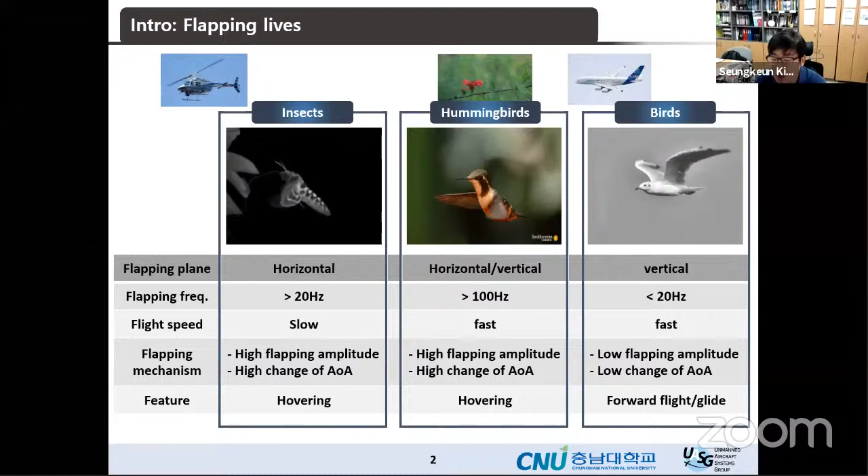But we are very interested in using this kind of bird mimicking flyers for the monitoring of the scene or reconnaissance, because it has benefits for energy saving, and it can easily use the wind. They are repeating flapping and stopping, so they can be very adaptive to the wind. So today I'm going to talk about the bird mimicking flyers in terms of engineering technology.

They are developing small bird mimicking flyers that can fly indoors. The wing shape is very similar to the pigeon, so it can fly successfully indoors. Our group is very motivated by this German company.

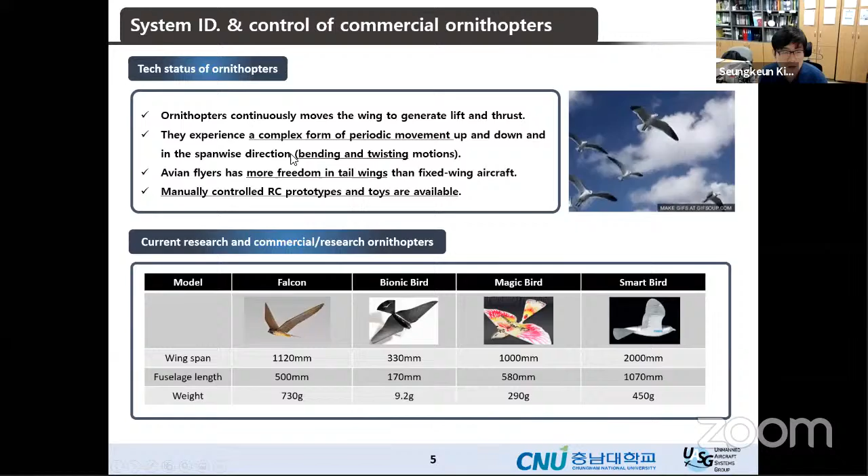Our research goal is platform configuration and modification of the RC aircraft, modeling in terms of a linear system, and controller design and validation. But the important thing is we don't have exact nonlinear modeling. So first, we did flight experiments and gathered flight data, and then in reverse we investigated the A and B matrices from the flight data. This can be viewed as system identification, parameter estimation.

This is the Magic Bird commercial RC aircraft. Endurance is just 10 minutes, and we can control the flapping frequency from 1 to 10 hertz. The elevator and rudder deflections are limited to this band. And then we installed the avionics board here.

You guys know the Pixhawk Mini. This is a very small sized Pixhawk series flight computer, just 15 grams. So we applied this Pixhawk Mini to the bird mimicking an RC aircraft.

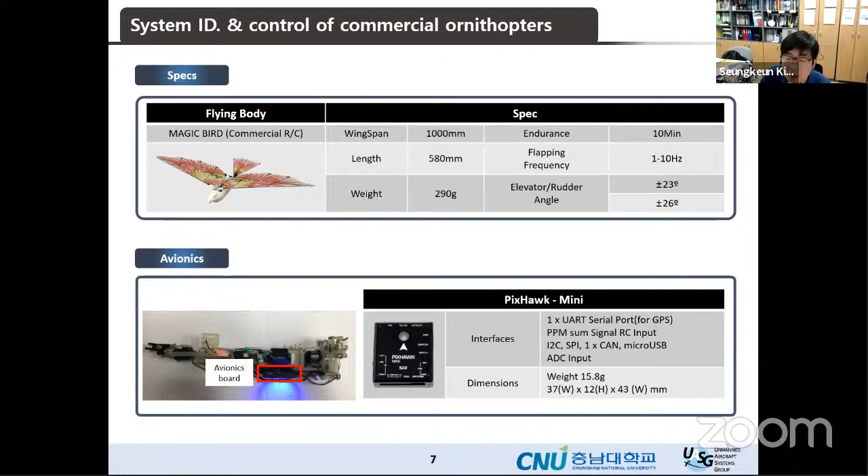And then for system identification, we need input signal design. So we could apply a step or doublet here, and then a 3211 signal for sufficient excitation of the dynamics. So in flight, we have to excite the dynamic response by using the control surface, up and down, so we can excite all ranges of the frequencies.

So we implemented the software in the flight code in the autopilot environment. We modified the PWM signal to additional channels. So we applied 3211: 3 up, 2 down, 1 up, 1 down. That means the time, so 3 seconds up and 2 seconds down, so we can control the elevator for excitation.

So this is the result. Actually we need angle of attack and sideslip angle, that is the relation to the wind. So we need alpha and beta, the angle of attack and sideslip angle for the aircraft. That is difficult to get from the sensors inside the small aircraft. We need angle of attack and beta vanes like this, but it is difficult to get the sensor mounted in the small aircraft.

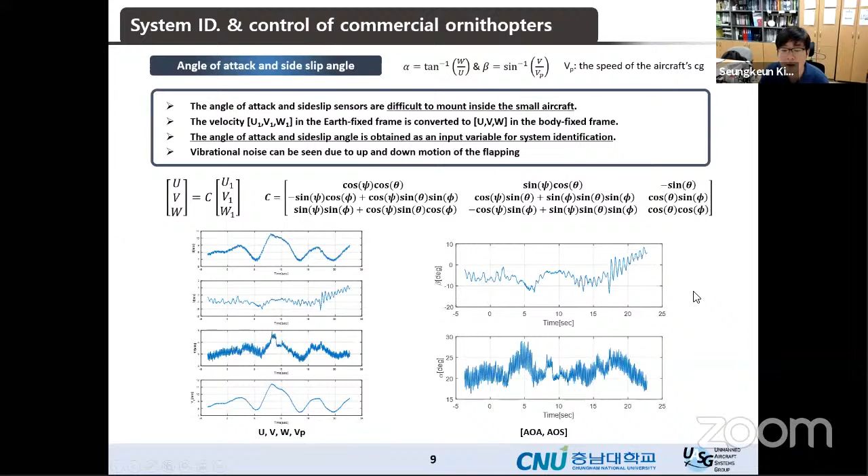So we apply the system identification technique for longitudinal and lateral directional system identification. So we need to estimate the parameters in the linear system here, 1, 2, 3, 4, 5, 6, 7, 8, 9, and then plus 11. So we have 21 unknowns in the linear system here. Not just 21, because we have 3 unknowns here and 3 unknowns there. So 27 unknowns for the A and B matrices.

So we can run an optimization technique using preconditioned conjugate gradient for reversely getting the A and B matrices for the linear system. So here x true is the flight data, and x hat is the integrated computed state response from this parameterized system. So from the flight data, we can get these 27 unknowns.

So here is the result of the system ID. This is the longitudinal and this is the lateral channel. The blue line is the flight data, and the dotted line is the model predicted from the system identification. So as you can see here, most of the unknowns are found from the system identification process. So we can get the longitudinal A and B matrices and lateral A and B matrices.

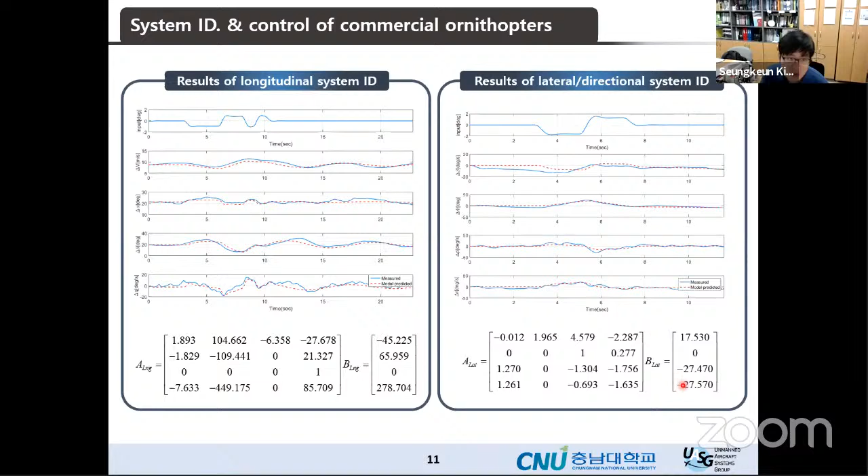And then these are the eigenvalues of each channel. As you can see here, there are two pairs of stable eigenvalues, complex poles. And then in the lateral channel, we have one stable eigenvalue, one stable real eigenvalue, and one unstable eigenvalue. So this is the roll mode. So actually, in the lateral directional channel, we found one unstable pole.

And then before the flight test, we designed the controller using PID and feed-forward terms here. So we decided the gains for the linear system, and this is the actuator model and aircraft dynamics. We applied the system ID result to this controller design and simulation. This is a very simple linear simulation, actually. As you can see here, the theta step response is well tracked, and the up and down motion is also well tracked. This is the theta reference and command.

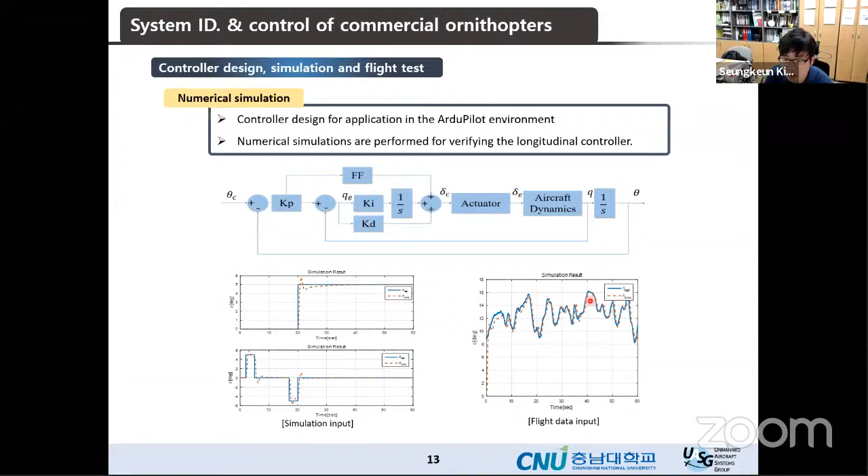And then we check the altitude channel. We apply a 30-meter command to the altitude change here, and the dotted line is the response of the dynamics. As you can see here, the pitch is going up and then goes forward, up to the 30-meter altitude increase.

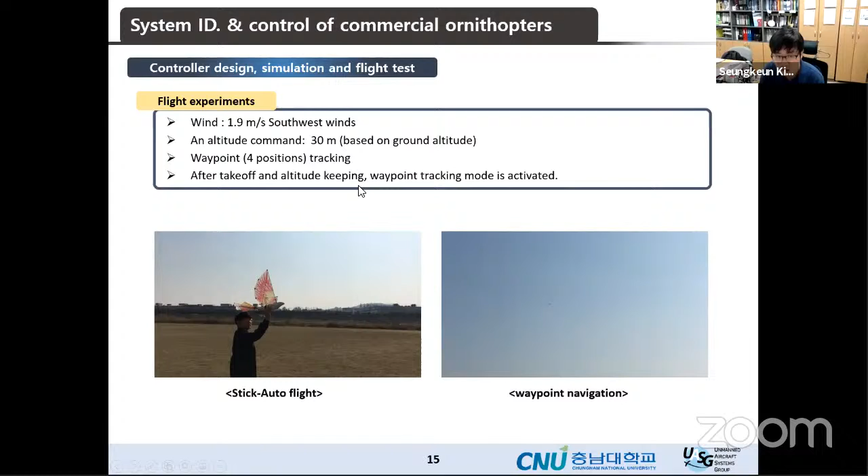Finally we did the flight experiment in this wind condition, and the altitude command is 30 meters above ground altitude, and then we designated 4 waypoints. After takeoff and altitude keeping, we activated waypoint tracking mode. This is stick auto fly.

So actually the commercial RC flapper is very stable. So we check the attitude control mode by using the stick command. So the pitch command and roll command is generated from the stick, from the RC controller, but the inner loop, the automatic control, is working.

And then after that, we activated waypoint tracking. This is automatic mode. Actually, one of our students lost the focus, so you cannot see properly. So this is the data. So this is the pitch angle, and this is roll angle.

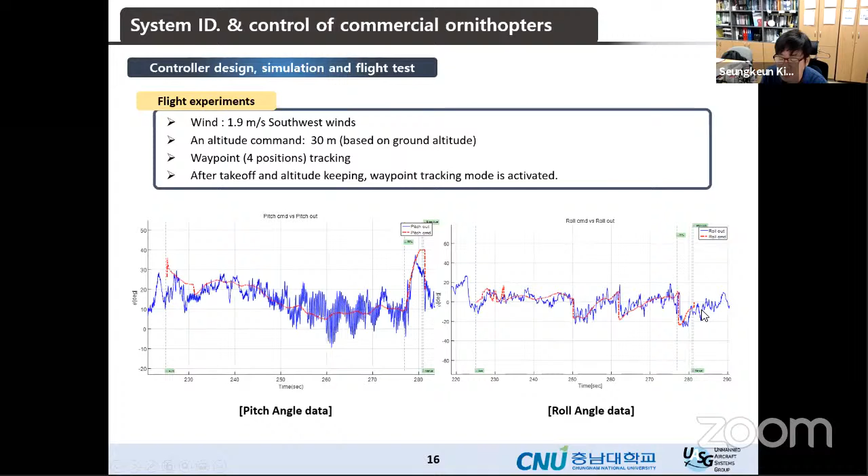So the waypoint tracking is successfully done by using the flapping wing, the bird mimicking flyer. So we can realize this kind of aircraft can be used for waypoint tracking, and then the reconnaissance mission, and then it can fly with small energy.

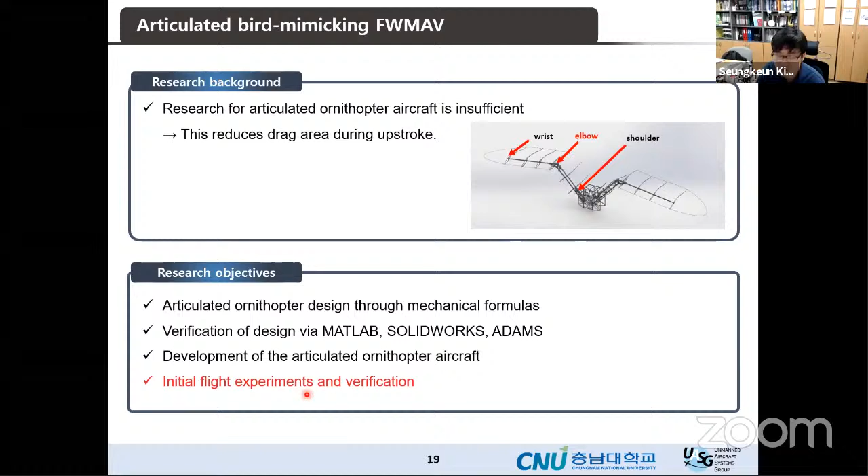So our research objective is articulated wing design through mechanical formulas and verification of design with MATLAB, SolidWorks, and ADAMS tools. And then we developed the articulated aircraft, and then we performed initial flight experiment and verification. We are much motivated by the fact this size is 1 meter and wingspan is 2 meters. So this is very big. Ours is smaller than this guy.

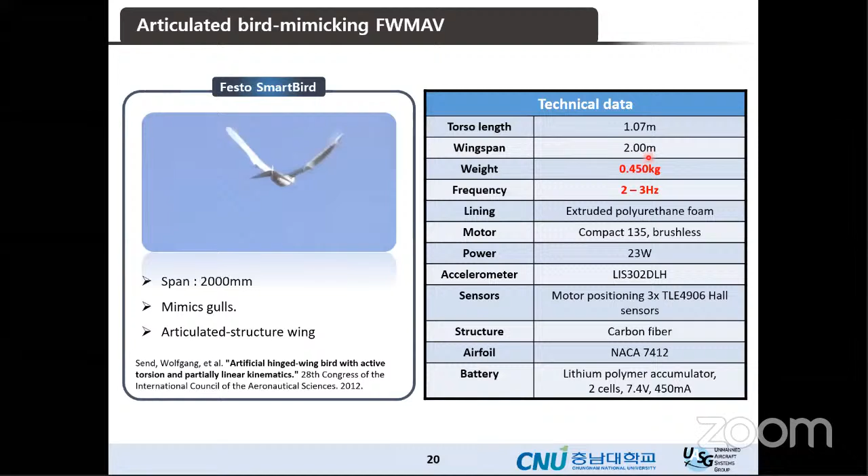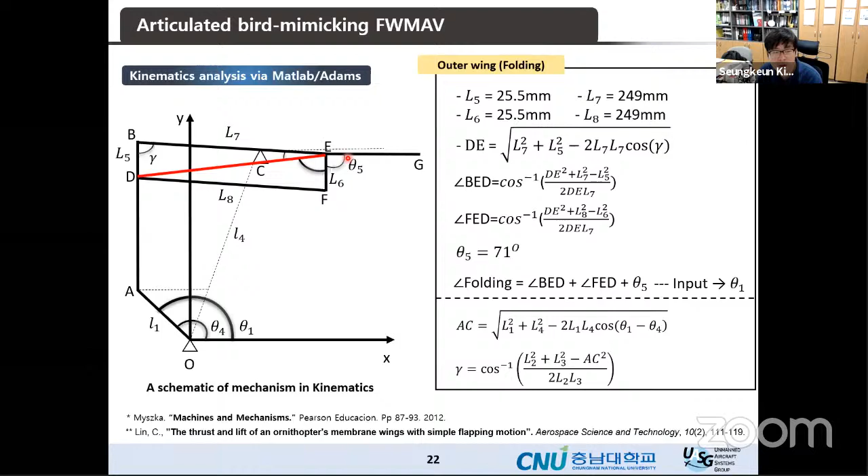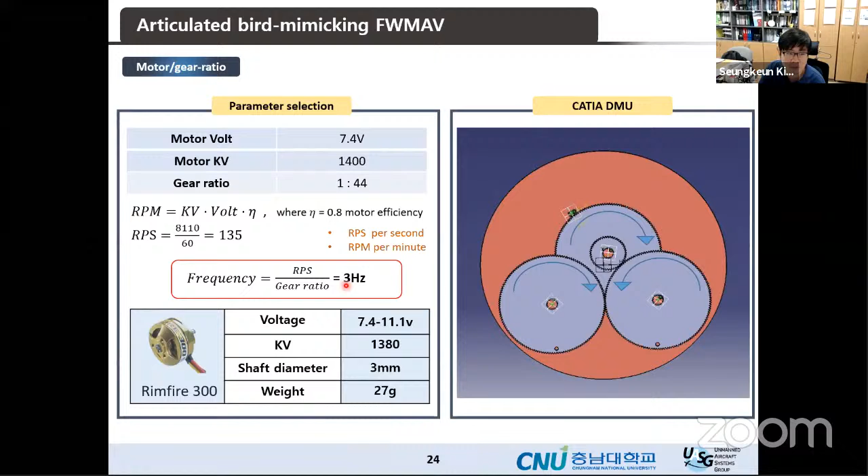And then this is the actuator for flapping here, and there is one motor. As you can see here, the tail degree of freedom is more than the fixed wings. And then we use the bearings here and there to make the intentional torsional motion on the wing. And then we use the commercial RC parts and receivers.

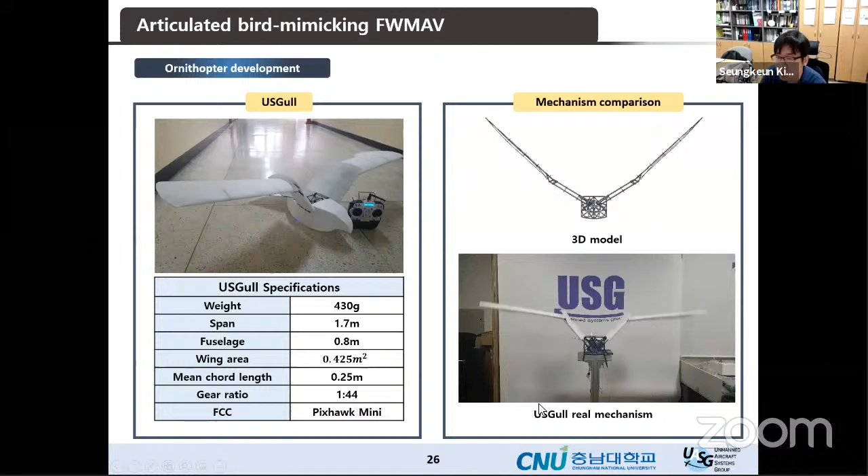Yeah, this is finally developed, this unmanned system. This is the board name. So weight is 430 grams and span is 1.7 meter. So this is our design. So the real mechanism is very similar to the 3D model, which verified our design.

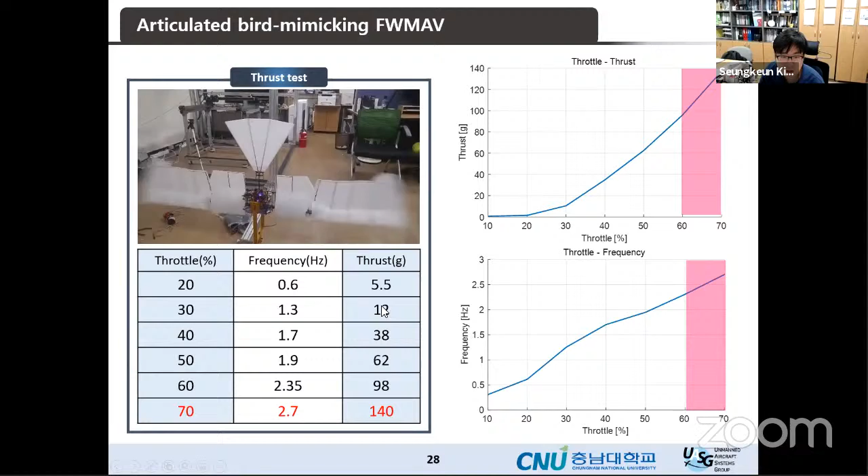And then this is the thrust. So by using some force sensor here, we want to measure thrust generated from the flapping motion. So depending on the frequency, with 70% throttle, we could get thrust of 140 grams. So this red area is our normal operation range.

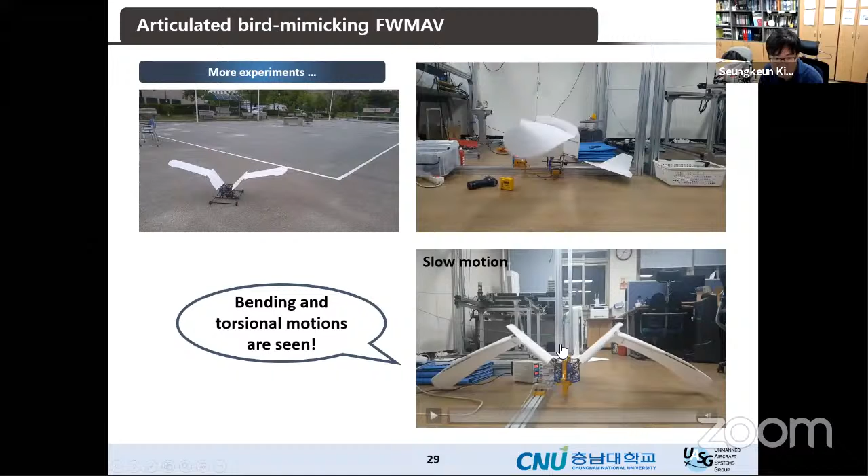Yeah, this is the test for forward flight. So we are measuring the thrust and the motion of the main wing. I will show you the bending and torsional motion using slow motion. Can you see some bending and torsion? So the outer wing will experience more torsional motion, just like a bird. And then we could minimize the drag during the upstroke.

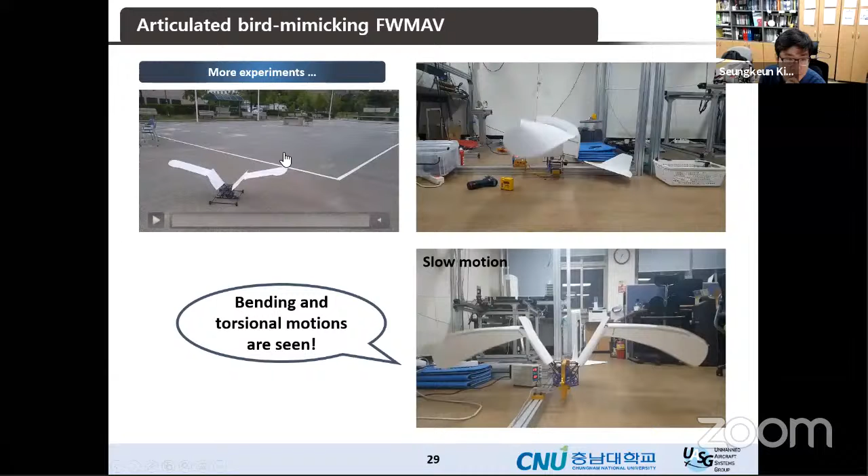And then one of our students did an interesting experiment in the basketball playground. I will show you. Yeah, this is the world first flapping car. So we verified it has the forward force, the thrust in the forward direction on the ground. And then finally, at last, we did the initial flight in Cheongju near Daejeon.

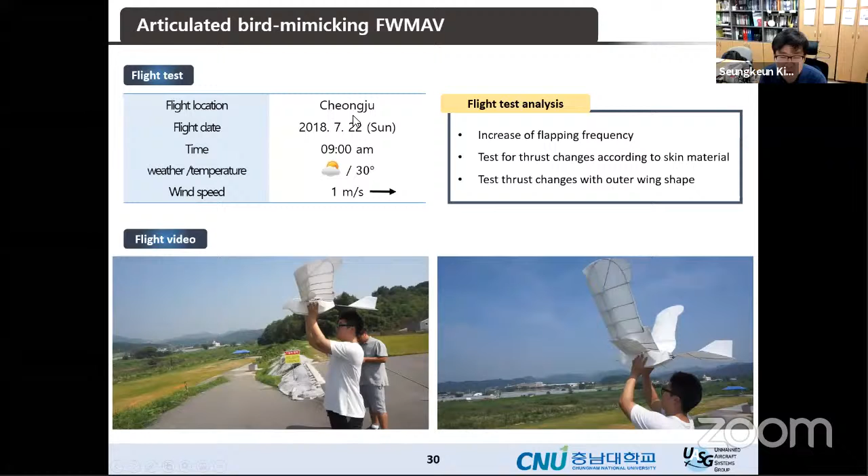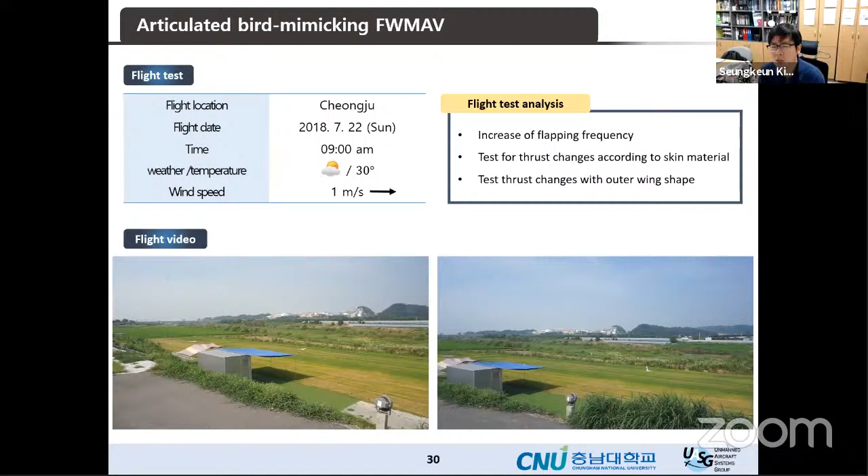Yeah, this is under our expectation. And then, yes, we failed in the initial phase because it had insufficient thrust and weight. So we changed the throttle mechanism, and then we realized some center of gravity problem. I will show you. This is the flight experiment in our university. Yeah.

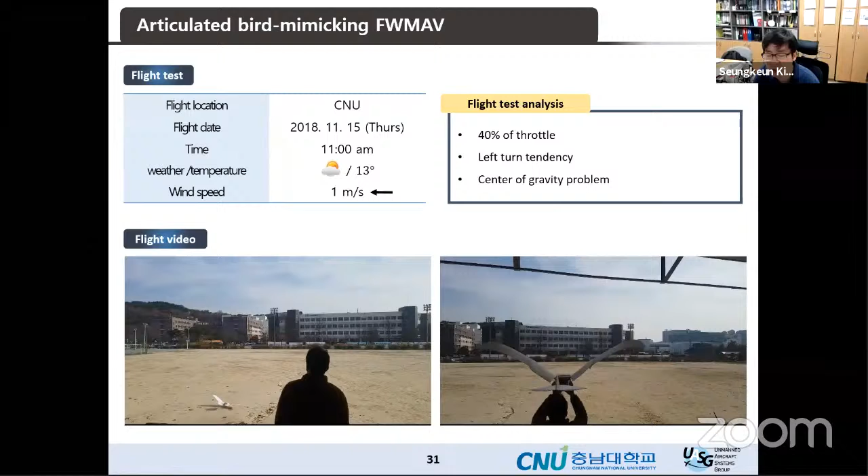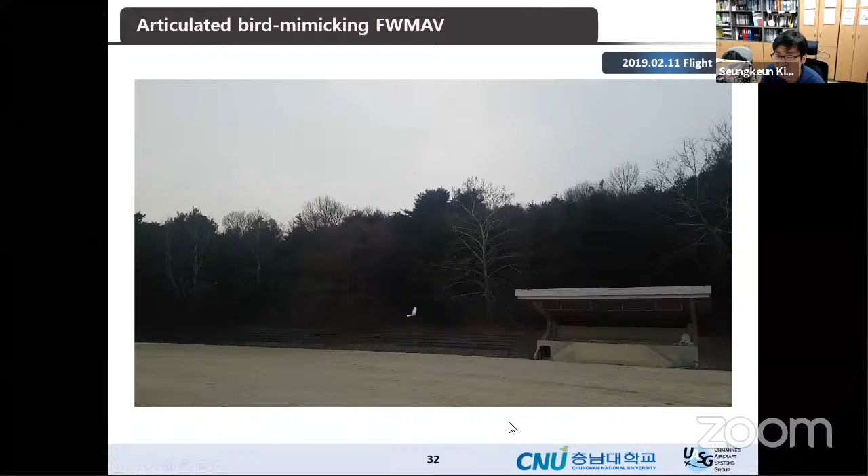So we struggled with the flight testing, many fails and many failures. So our research team was very disappointed in this kind of flight experiment failure. So this is last year's flight in our... Yeah, finally our ornithopter is in the air.

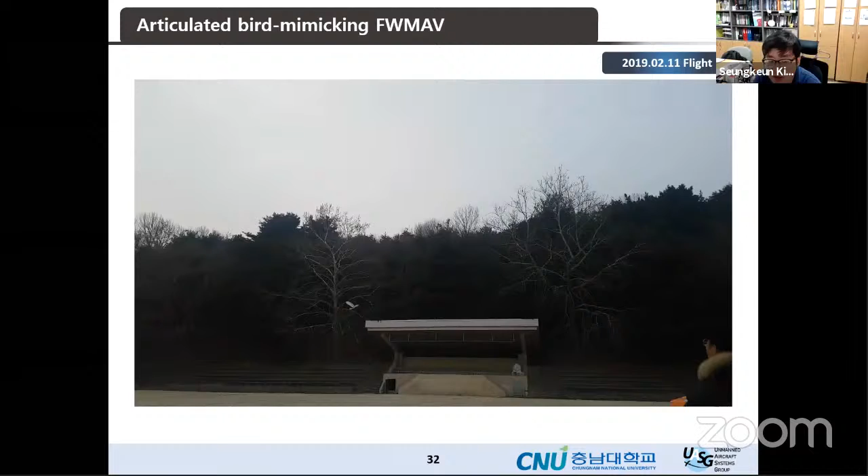So we modified the flapping mechanism and the wing shape and then the position of the center of gravity. So we successfully made this fly in the air last year. So we are modifying the mechanism, and this is ongoing work. So our students are laughing.

So actually this kind of bird-mimicking flyer, if they are going up, we cannot discriminate it from the bird. So actually it has some camouflage effect. And the speed of them is very similar to the bird, and the flapping motion makes the enemy confused on their radar system.

Okay, now I will finalize my presentation with discussions and Q&A. So we did system identification and controller design and simulations of RC ornithopters. System ID was done successfully with a modified open source autopilot environment, specifically ArduPilot. I've not used the PX4, so we applied the ArduPilot. And then altitude hold, and waypoint navigation were successfully performed.

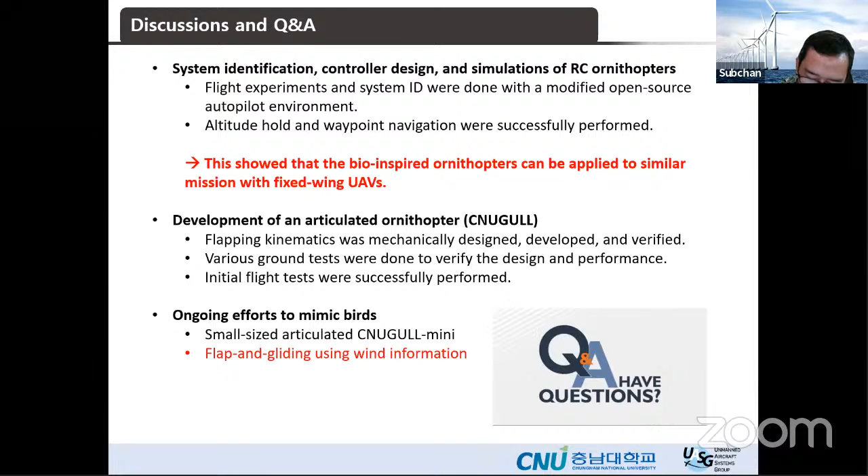So, Dr. Okay. Subchan, yeah. Thank you very much, Prof. Kim. Very, very interesting, Prof. Kim. I think Mr. Hendro will make a competition using bird mimicking soon, maybe, because in Germany, Festo has very, very good bird mimicking. Yeah, it's very, very interesting. Anyway, we will have questions and answers at the end.

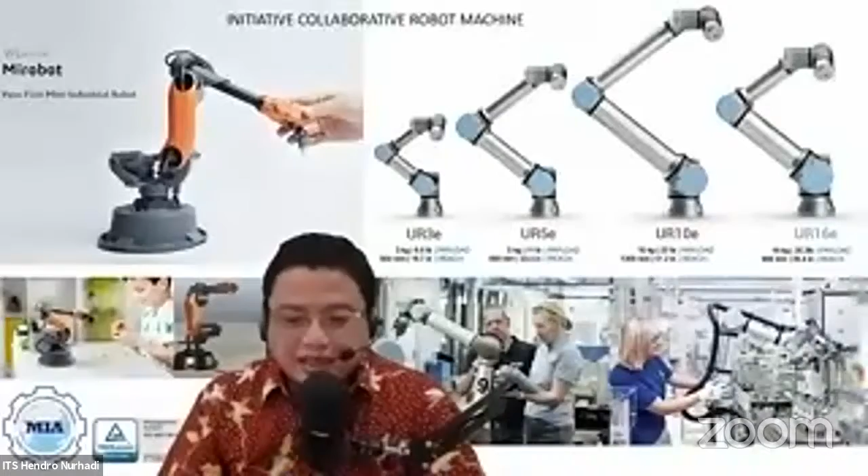Excellent presentation from Professor Kim. Good morning, everybody. Different from Professor Kim's presentation, this time we would like to emphasize how to initiate. So let us introduce the initiation: designing and developing a collaborative robot machine instead of differentiation of industrial robotics. So I will try to put the presentation on the share screen.

Okay, this one. Oh, which one is this? Oh, this one. Sorry. Okay. Is my PPT already available on the screen? Yes, very clear. Thank you.

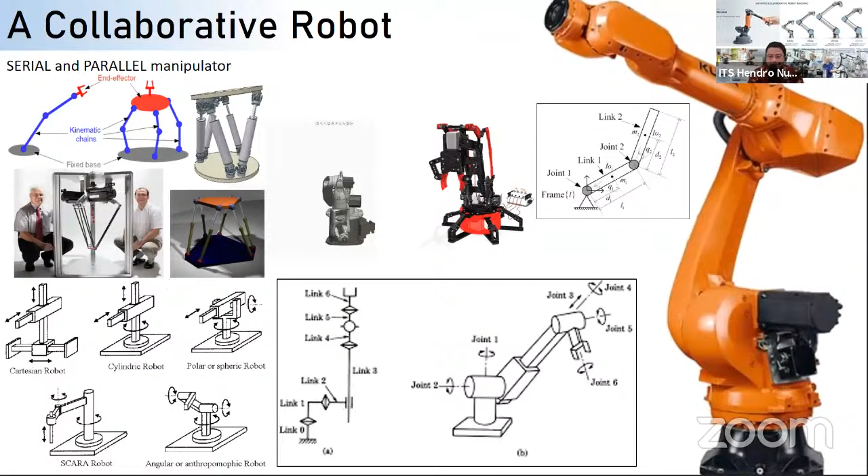Okay, in the definition of robots, we know that a robot is a tool. A robot is a helping medium for human beings to perform jobs in the daily activity of a human being. What is interesting is that recently, since the 2000s, so-called collaborative robots have been developed. What is a collaborative robot?

In 2005, Universal Robots was established and developed the first generation of collaborative robots. Omron, one of the biggest companies that intensively develops mechanical and electrical applications together, mechatronics applications, defines cobots as collaborative robots that can be used to build an innovative and intelligent manufacturing environment where humans and machines work in harmony. That is the key point actually. Humans and machines work in harmony.

In other words, in Wikipedia, we found that cobots or collaborative robots are robots intended for direct human-robot interaction within a shared space or where humans and robots are in close proximity, as cobots are intended to work alongside humans.

So what is different between classical robots in industrial applications and collaborative robots, which are actually also part of industrial robots? If we talk about collaborative robots, we have to pay attention to the safety and the comfort of a human being in performing their activity or daily jobs. That's why collaborative robots are regulated by several standards of safety and security and also environmentally friendly regulation.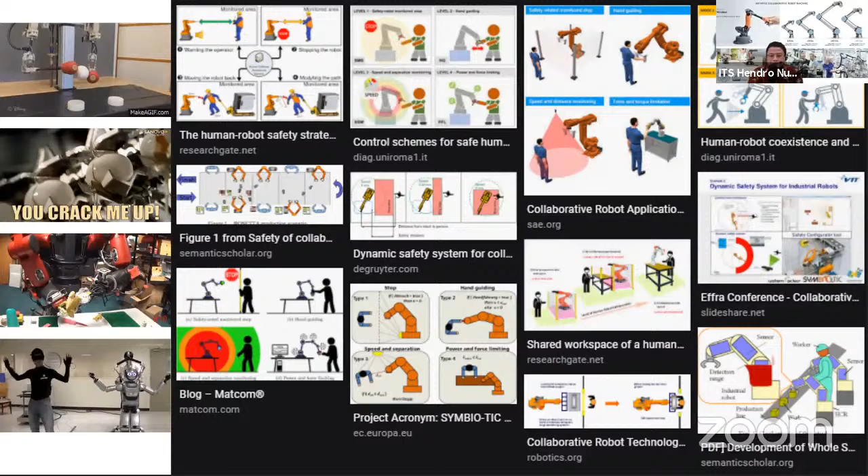So in this phase, in our center, we are now starting to design and develop collaborative robots. In the design phase, we try to get references from Universal Robots collaborative robots and also other references such as Omron and different types of collaborative robots from different companies. But the key point of the design here is that we refer to several commercialized products.

The key point that we want to get from the designing phase by observing the commercial products is to get the design criteria. Since several robots are already developed, they are designed with several conditions, with several payloads, with force in the range of 3 kilograms, 5 kilograms, 10 kilograms, 16 kilograms, compared to industrial robots that usually may accommodate a payload of 1 ton or several tons.

That is the biggest difference between the classical industrial robots, without sensing of human interventions, and collaborative robots that are intentionally designed and dedicated to collaborate with human beings. So we are currently just starting to design the design criteria, focusedly in our center. And the developing phase runs in parallel with several students from the mechanical and industrial engineering departments, and also the physics and mathematics departments, mostly current interns in our center from the mathematics department.

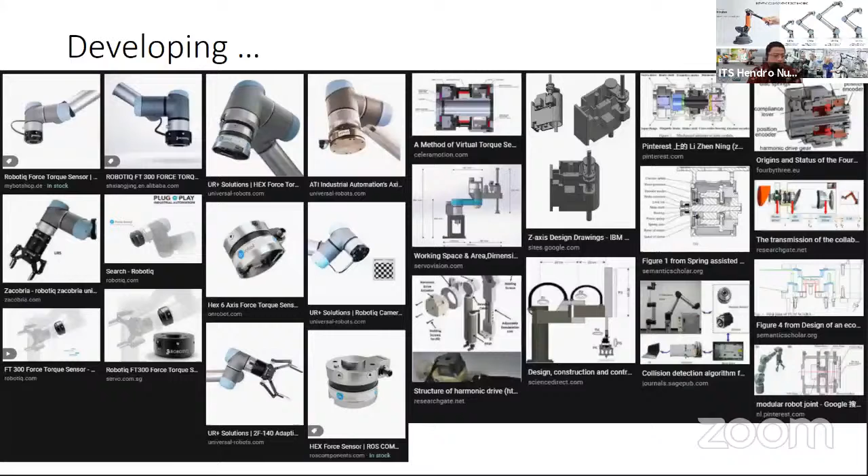We refer to three kinds of commercial or ready-developed robots. The first is collaborative robots by Universal Robots. Nowadays in our laboratory there is one collaborative robot provided by our industry partner, PT Handal Yasindo Sejahtera. They support us by supplying one collaborative robot of type UR5, but without the E specification. E means that the collaborative robot by UR is already completed with sensing devices, so we may collect and identify information such as force, torque, and velocity simultaneously. But the robot in the previous CB version doesn't have this kind of specification yet.

And also Omron. So we can see that although they are different companies developing collaborative robots, the outlook and the designs all look similar. Collaborative robots developed by several industries have identical geometrical shapes and configurations. The cobot configuration consists of 6 degrees of freedom, and normally consists of 3 main components. The first component is the robot itself. The second is the control panel. And the third is the programming pendant or remote control, wireless or wired.

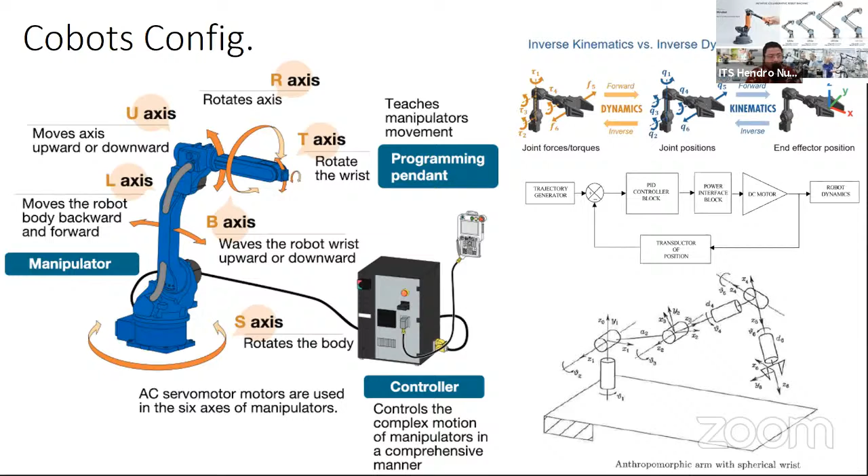Okay, so what actually is maths in cobots? We also have one speaker here, Dr. Latifah. She is my colleague in the mechanical engineering department, and she is also an expert in robotics mechanisms. And this formula looks very close to Bu Latifah.

So math in cobots is relatively close to rotational matrices and transformation matrices. There are some illustrations in our presentation of how we design the performance criteria of our robots using rotational matrices and transformation matrices, by homogeneous matrices or non-holonomic robot performance matrices for different types of robots. And in robotics, the Jacobian matrix is one of the tools that helps us know the relation between joint velocities and end-effector velocities of the robot.

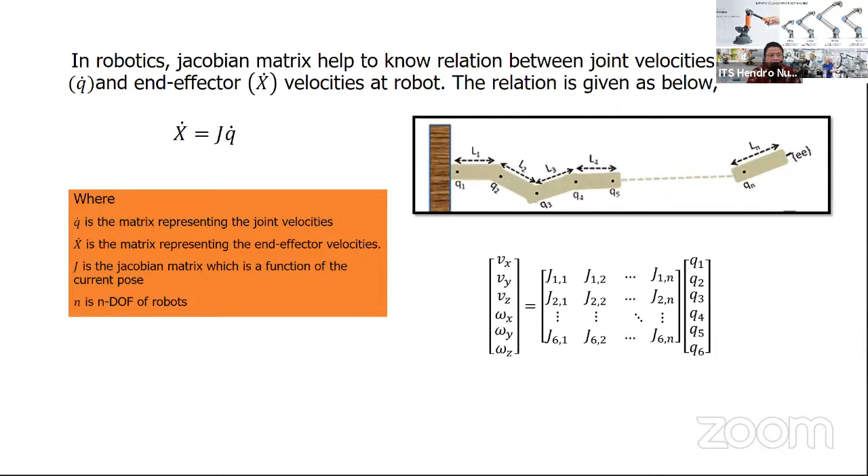There are many maths tools we may apply to identify and design the performance criteria of how to move our robots. There is one example, a simulation in MATLAB, of how to calculate the rotational transformation matrix using a Jacobian matrix. As we see here, we may design the forward motion and identify the inverse information of our robot performance, and vice versa. We may put in the inverse kinematics information, and we will get the coordinate information.

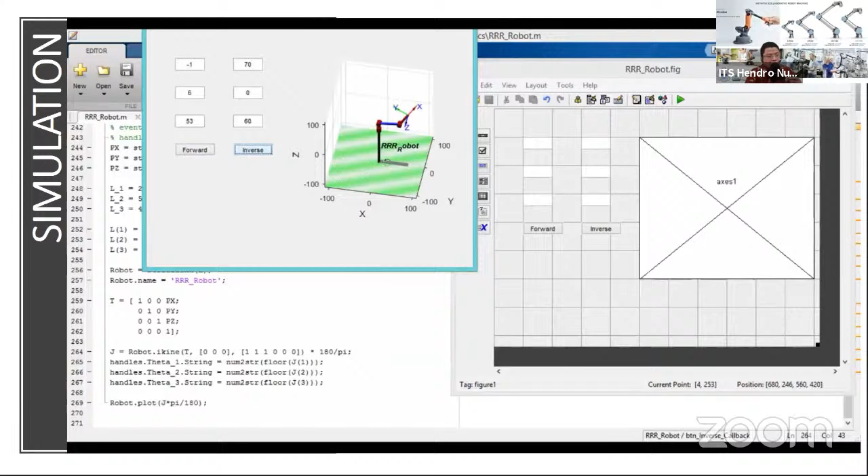Okay. And now we are collaborating with PT Handal Yasindo Sejahtera at the Robotics Center. As you can see, we are first collaborating among ourselves. It is time for us now to go outside, to ask everybody to join us in doing reverse engineering, starting from the end and finishing at the beginning. That is the philosophy of reverse engineering, and we will focus on high-level control design in developing a collaborative robot, since many industries have already developed this kind of collaborative robot, starting our own high-level control of collaborative robots. And stay happy, since happiness may increase our immunity.

And as I mentioned at the beginning of the presentation, Pak Subhan, I would like to ask your permission to access our laboratory to show you the live demonstration performed by our students, who have already prepared. So please.

What is his name, Mr. Hendro? Slati, actually. The Zoom account is a Slati account. Just a second. Wait. Slati? Just a second. I have to make them a co-host first. ITS. Okay.

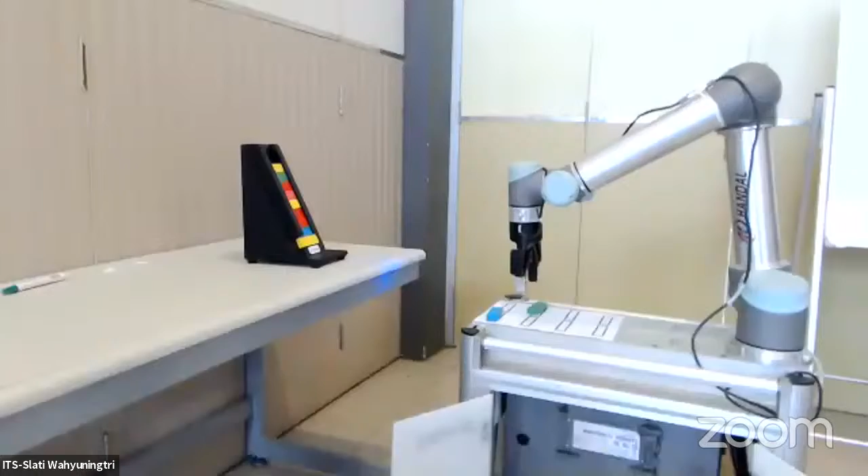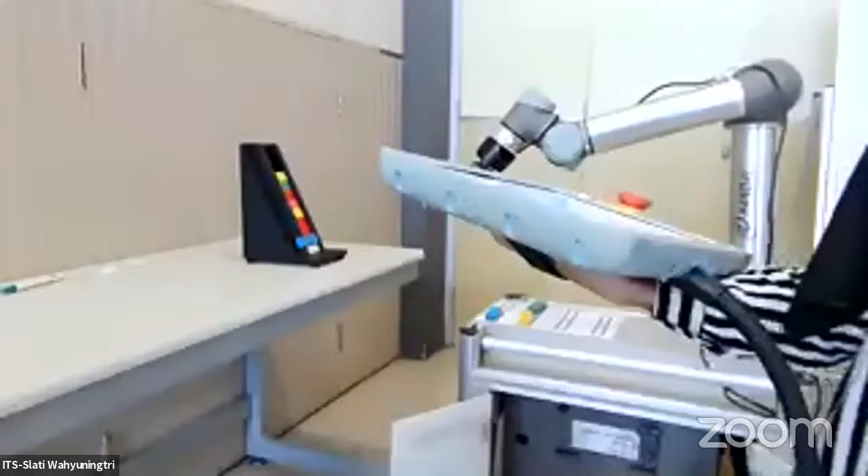Yes, this is a robot from PT Handal, and we can control the robot from the teach pendant. Okay, can you show your teach pendant also? Yes. One of you who holds the pendant, show all the audience, all the viewers, that you operate the robots. Okay, this is the teach pendant of the robot. We can operate the robot manually or automatically. So who is this? Sulastri or Slati or Salma or Mega? Here. So we can

It seems that, sorry, Pak. Oh, Cory. Okay, Cory is a master's student from mathematics also. Mr. Hendro is hijacking my student actually. Thank you for supplying the students to our center, Pak Subhan. Yeah, it's okay, quite good collaboration. Yes. So Prof Kim, in Indonesia it is interdepartment. We have interdepartment collaboration, especially with the Center of Mechatronics and Automation.

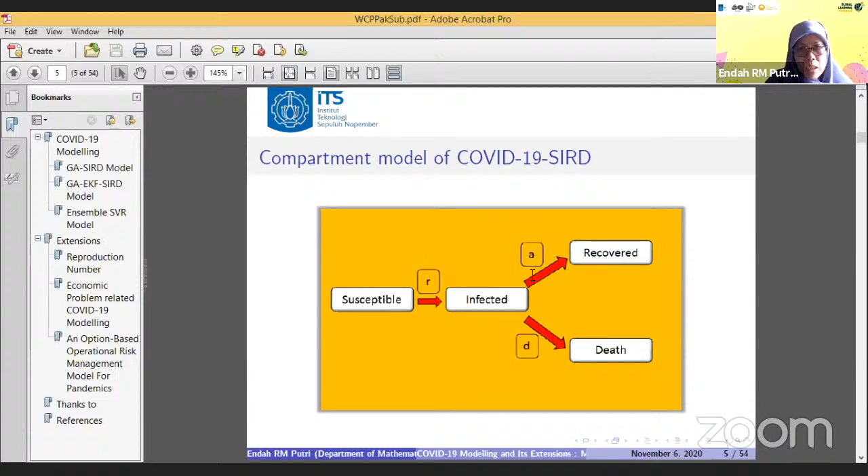Here, the first hybrid model that we use is a genetic algorithm SIRD model. In this method, we estimate the parameters and also the initial values of COVID-19 spread by using a genetic algorithm. A genetic algorithm is an algorithm that mimics a natural evolutionary model by using genetic inheritance. It uses crossover and mutation operators to process the chromosomes in the population until we get the best result of prediction. This is the genetic algorithm workflow.

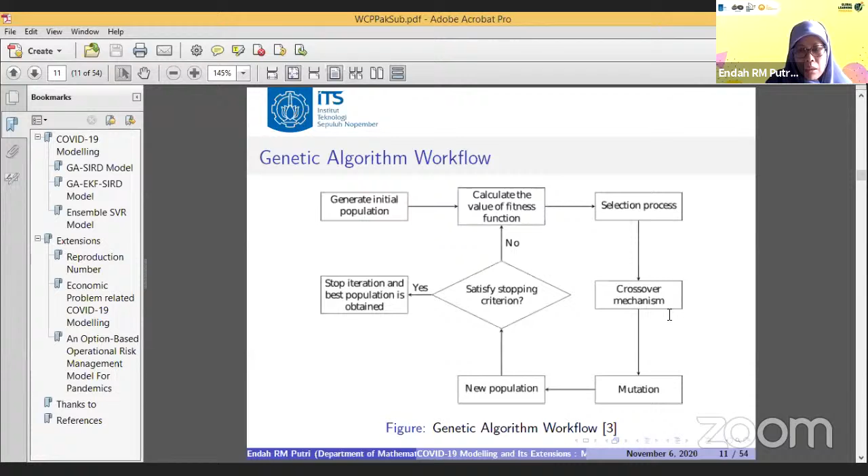Starting from generating the initial population, then we calculate the value of the fitness function, and then we select the best fitted fitness function, and it is like a closed loop that will stop after satisfying the stopping criterion. The stopping criterion is related to the best prediction or the smallest percentage of error. And here is the detailed stage of the genetic algorithm.

Here we have the daily data of infected, recovered, and also death. We apply it to Indonesian data, obtained from the official website of the government, so we assume that the data represents the condition of the COVID-19 spread. There are 5 stages, and the basic point of these stages is to have the best chromosome. In this step, we can guarantee that the new chromosome is definitely better than or the same as the previous chromosome. So that is the basic algorithm.

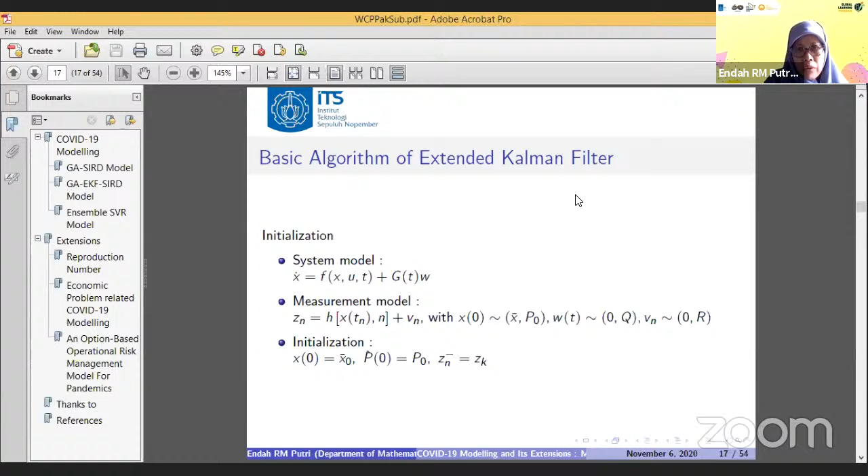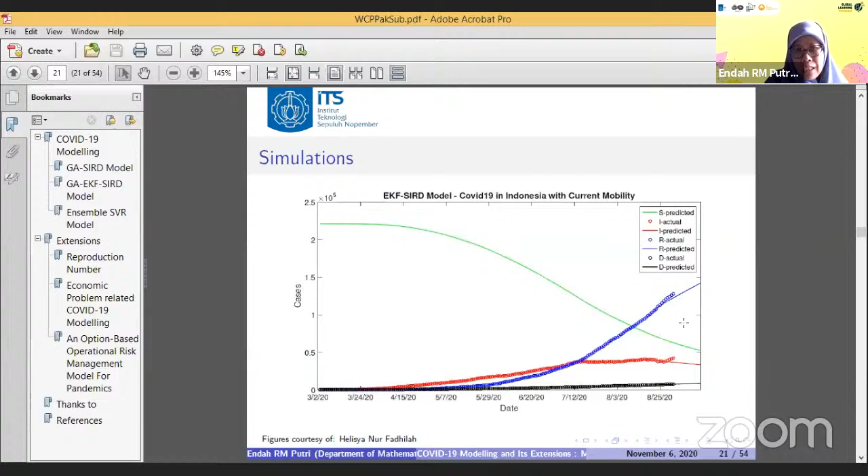So in the extended Kalman filter, we can update the prediction based on the incoming actual data. In that process, the result will be better because one step ahead, the prediction will be improved by the incoming actual data. So this is the result of the simulation, and we can see that the prediction result can follow the actual data better than the GA-SIRD model. So here we can consider that EKF can improve the GA-SIRD model.

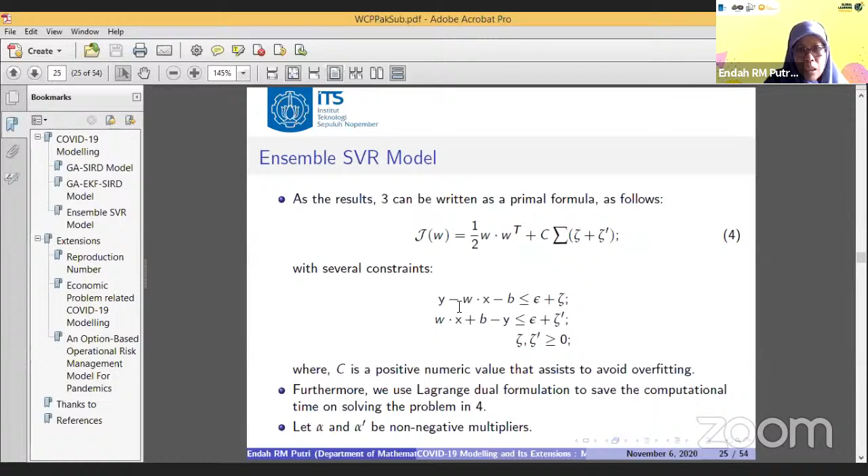And now the third model is different from the first two hybrid models. Here the model is purely a machine learning method, called the ensemble support vector regression model. And this is the basic algorithm of the method. I'll go through it just at a glance. And this is the last formula using the method to be solved. And based on equations 5 and 6, we can provide the simulation result like this.

And basically, the first step in the ensemble SVR model is about ensembling or generating sample data, and it will ensemble the actual data from other countries' data. So the idea here is that we will find the most suitable or the most fitted distribution of other countries' data to Indonesian data. So here we use China, South Korea, and Malaysia to be our ensemble sample data.

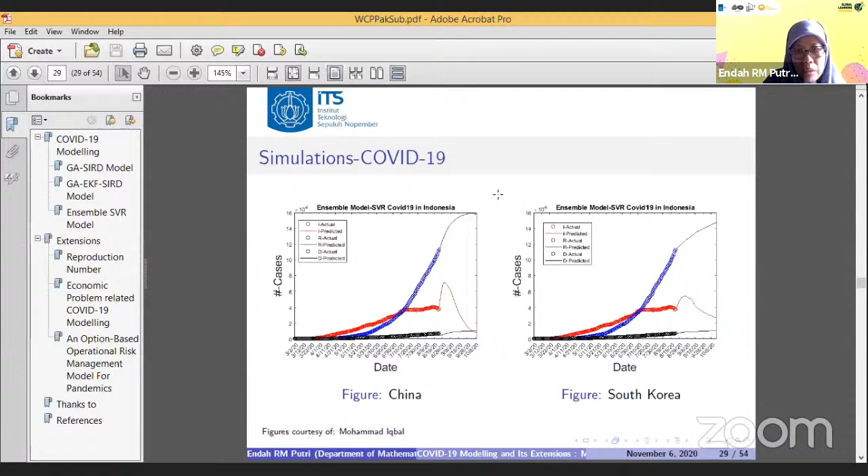As an extension, we can use the prediction of the spread of COVID-19 to determine other subjects or other fields. The first is about reproduction number. We can use the reproduction number to measure the severity of COVID-19 spread. So by having the reproduction number, we can measure whether the spread is weaker or still very strong in our surroundings. So in modeling disease transmission, it can help us to inform and evaluate control policies.

We sometimes hear from the government about the reproduction number and how it can be used to decide whether the partial lockdown, like in Jakarta, will be continued or stopped based on the current calculation of the reproduction number. And this is the paper by the SimcovID team, where we are joining their research.

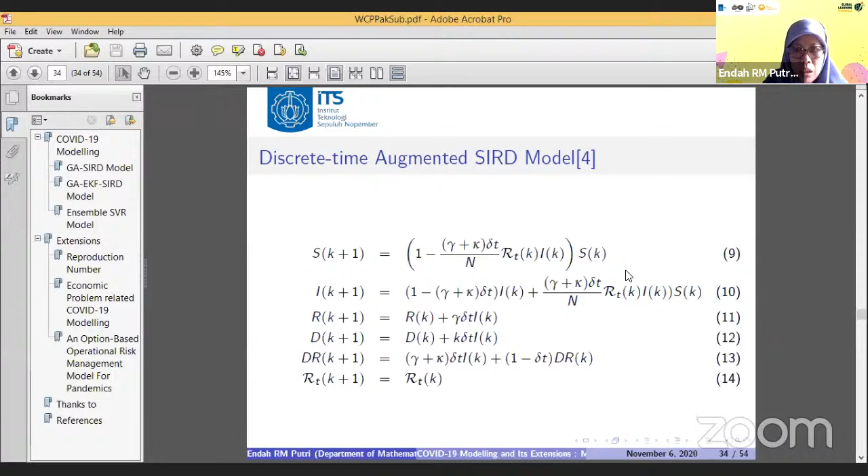And here is the formula based on the SIRD model. The previous SIRD model that I have shown to all of you, we can extend to calculate the reproduction number. So we can obtain equation 7. And by augmenting the model, we can have the new discrete SIRD model. In this paper, the researchers also incorporate the extended Kalman filter into the model, but in a different way from the one that I explained previously. And this is the discrete equation, and we use this for simulation.

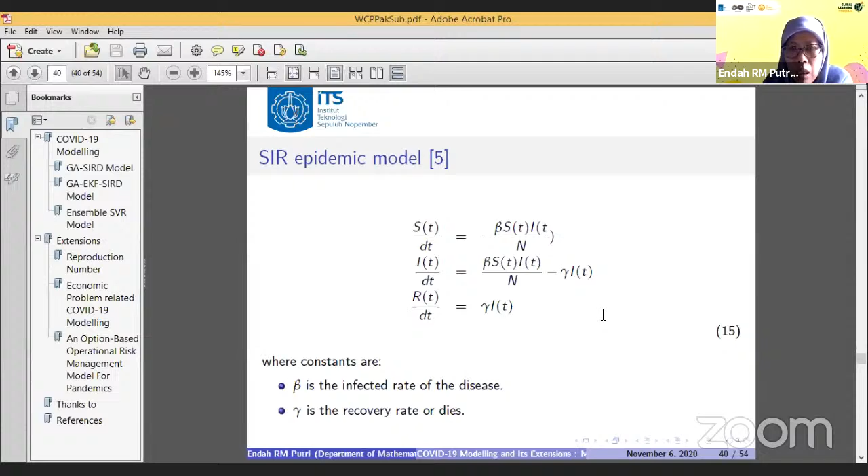Here, we need to predict who are infected and who are recovered, because it is related to the employees of some companies. So the companies have stock, and the stock price will definitely depend on the condition of the company, and the company condition depends on the condition of the employees, are they healthy or not, to be able to run the production process of the company. So it will have a big impact to determine the number of infected people or recovered people

in this case. So here we assume that the economy consists of capitalists and workers, and they own the capital, stock, and labor. And here, the paper used the capital growth rate as exogenous and log normal distributed. And here the capitalists hire labor at a competitive market and produce a perishable good. And here we will use the Cobb-Douglas production function. So this is the type of utility function of the production process.

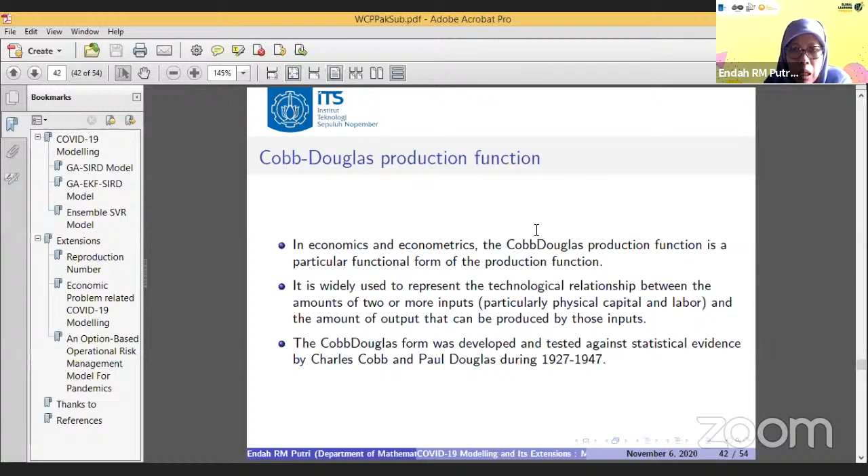And here, this is the information about the Cobb-Douglas production function. And this is the function that will be used for the study. However, it can be changed by using another production function. But suppose this type of production function. After that, we will try to measure the constant relative risk aversion. As we know, investors or the capitalists have natural behavior to be risk averse. Risk averse means that they don't like risk.

They avoid risk. So that is the basic or natural behavior of the capitalists that we have to consider in this modeling. So here we have this measure based on equation 18. So this is the equation that we use. C is the consumption, and this is the constant CRRA. And the asset pricing here, we calculate the firm profit based on the Cobb-Douglas production function, which represents the profit that comes to the company, because we have labor here, and also we have, let me see, the K.

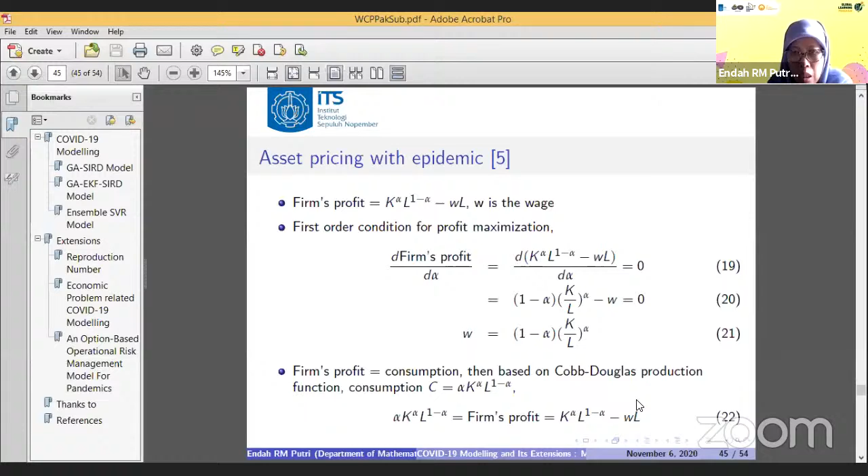And by using equation 22, we assume that firm's profit should be equal to consumption. And this is the natural condition of the production and company. So we have this. And there is a stochastic discount factor. Here we use a discount factor because we try to value what happens in the future, but we will see the case from the current point of view. That's why it is called a discounting factor.

Okay, and this is the equation that we will use for calculating the price consumption ratio. And that is the last equation to obtain VT for having the impact of COVID-19 on the economy in terms of the stock price of the company.

And the second topic of economic problem is about the operational risk management model for pandemics. The idea is that a company has their employees infected by COVID-19, like maybe you have heard about the Sampoerna company who had to close for a while because around 100 employees got infected by COVID-19. And the idea here is how to measure or maximize the profit of the firm by continuing to operate or suspending the business. So the idea is close the firm or still open the firm while their employees get infected by COVID-19.

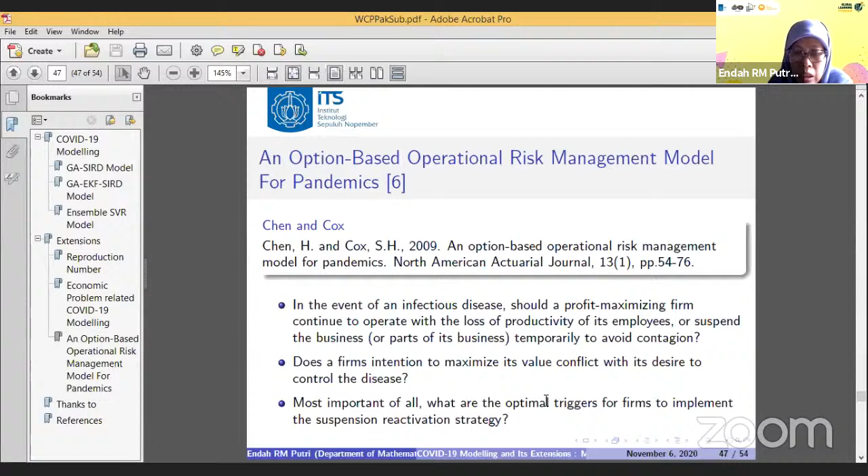So they have to juggle between the two important considerations. And the last is about the optimal triggers for firms to implement the reactivation strategy. So here there are two stages. The first stage is that we adapt an epidemic model, which is a bit different from the ones that I already talked to you about previously. And the second stage is incorporating a regime switching.

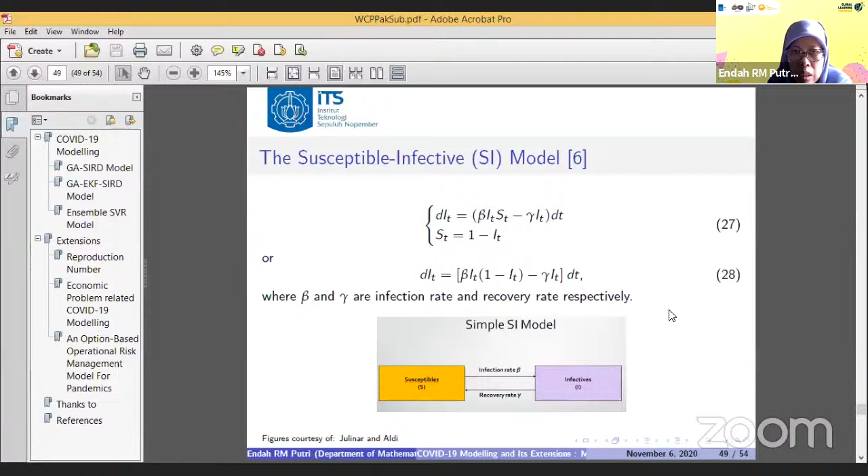Regime switching means that we need to consider two states or two conditions of the company. Should they open the company or should they close the company regarding the COVID-19 spread? And this is the model, a simpler model that we will try to apply. It is called SI, only susceptible and infected. And a stochastic modified SI, allowing external contagions and death.

So the company can hire new employees to replace their infected employees. And also the company will lose their employees due to deaths caused by COVID-19. So this is the mathematical equation that we will use in the study. And this is the cash flow function in a regime switching model that is related to the COVID-19 model.

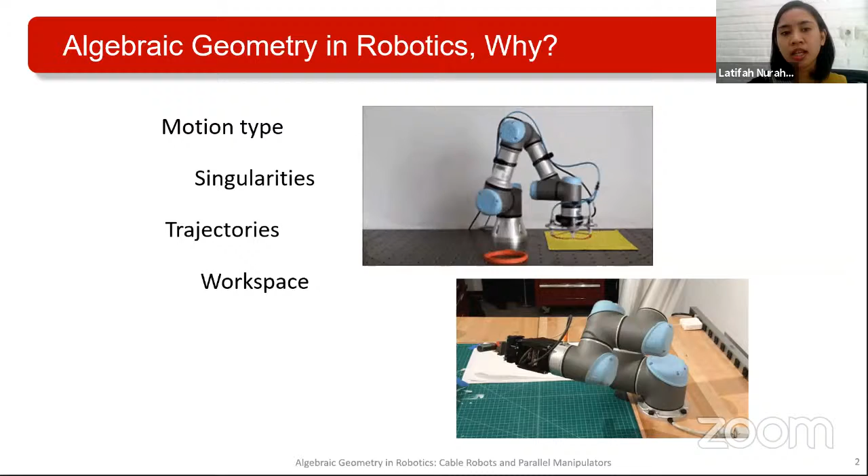So one simple illustration, one of many illustrations of singularities. In the bottom animation, you see that the robot should maintain constant velocity, but at some point the robot collapses, the robot drops. So the robot is not able to maintain its behavior for doing our desired task. So this is singularities. So for doing analysis of motion, singularities, trajectories, workspace, we are using algebraic geometry.

So of course, for doing that, as you can see in the previous very amazing presentations, we have to formulate a set of polynomial equations. They can be of very high degree, degree 10, degree 40, etc. So how are we going to solve this set of equations? We need a powerful tool, and the tool I'm choosing is algebraic geometry.

Now, what is algebraic geometry and what kind of tools are we going to use? In the first presentation, if you paid attention, and even in the second presentation, in robotics we always deal with transformation. We transform the position to the frame that we want, which we call a fixed frame. This is a very simple illustration.

For doing the transformations, we may choose many types of parametrizations. We can use Euler angles, U, V, W, pitch, roll, and yaw. But the drawback of using that is we face gimbal lock. You are probably familiar with this.

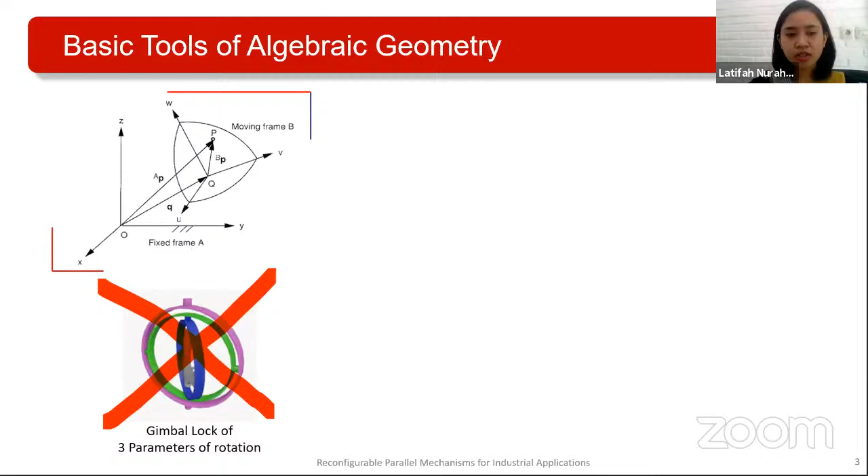Now we move on to quaternions. One reason we are using quaternions is because they are homogeneous, so we don't face gimbal lock in our parameters. Another tool we are using is primary decomposition. Basically, this is the same as what we had even in elementary school. For example, if we have 20, we decompose it into prime numbers and so on. We use primary decomposition not for numbers, but for sets of equations.

The next tool we are using is Grobner basis. This is quite a new tool developed by Austrian mathematicians for solving mostly symbolic equations. And the fourth tool is vector and matrix operations. This is a very basic tool that we have to use to solve engineering problems. By using all of these in combination, we can solve a set of equations in the mechanisms.

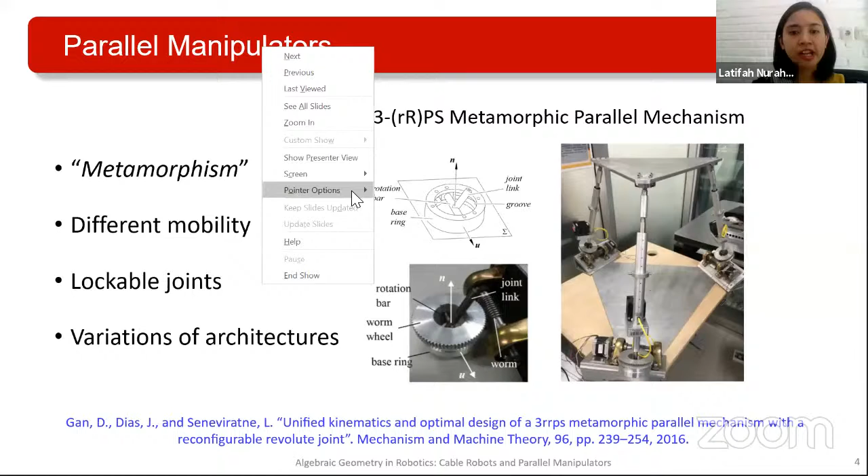In these mechanisms, if you replace the bottom joint with what we call a universal joint, we might have many types of motions. We call this different mobility. Mobility is also a type of motion, and we call it a lockable joint. In manipulators, if you are interested in working on them, you will deal a lot with joints. Here, instead of using a simple pivot or pin, we replace it with two pins, so it becomes a universal joint. One joint can be locked, so we call it a lockable joint.

By taking advantage of this lockable joint, we may reach many types of architecture inherently. From outside it is probably not clearly seen, but by rotating one of the joints discretely, we may reach a different kind of architecture. This robot actually belongs to my partner, and we met at a conference. We had something in common: I have the tools and he has the problem with his robot, that he doesn't understand how this robot changes from one architecture to another.

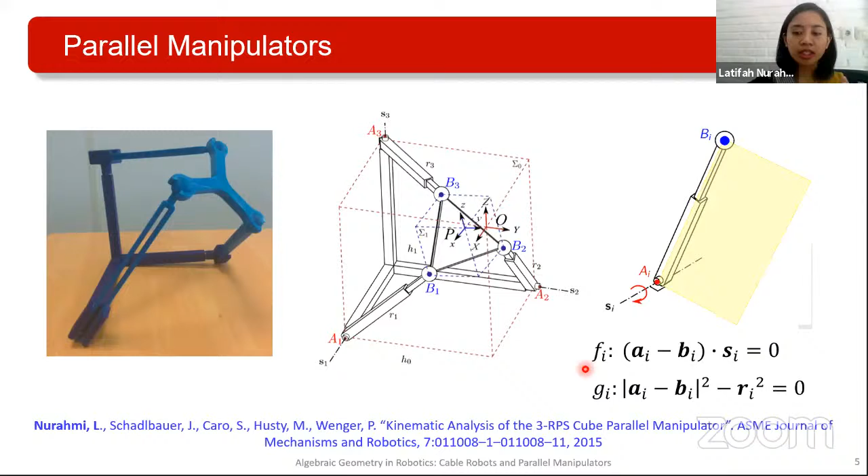And then we can formulate the vector operations that the lines A, B are always perpendicular to each other. So it means the dot product is equal to 0. So from these formulations, we found many results about these manipulators, like the workspace. The workspace again is the points in the three-dimensional space that can be reached by the moving platform. So the platform is moving.

So the shape of the workspace, and for mathematicians, I believe you are all familiar with this. I only knew this surface at the time when I found this; I didn't know this surface before. So actually this mechanism is able to trace points just like the Steiner surface. And this surface was already pointed out by mechanical engineers in 1990 in their book, but they didn't know that their theory can be realized in real life.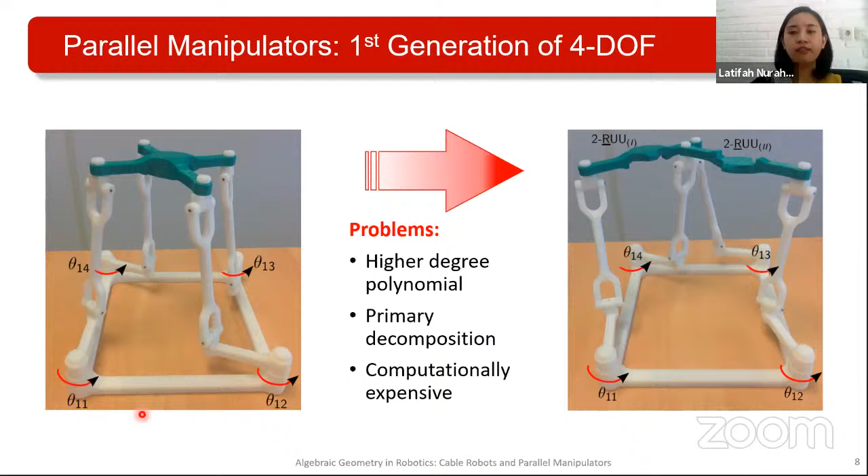So what we did, we decomposed these parallel mechanisms into 2. You see in the right picture, we decompose it into 2, the right one and the left one. Then we do our computations. And again, what is the algebraic geometry that we derived here? We take a look at the axes of joint B and joint C, how they are reacting to each other. Then we can formulate the lines. In geometry, we work a lot with lines, which is very simple. I believe you all can do the same.

So the line V, the line N, and the line connecting BC are all lying on the same plane, which is the yellow plane. So again, we can formulate its algebraic equations, and these are the equations for my manipulators. And finally, from this equation, we did some computations and came up with results of what this parallel mechanism is able to perform. Please excuse me that we are using more robotics terminology.

So this manipulator, this robot, is able to perform 4 degree of freedom types of motions, and it has 2 types of 4 degree of freedom motion. Type number 1, type number 2, and type number 3 is actually no longer 4 degree of freedom, but it is 2 degree of freedom.

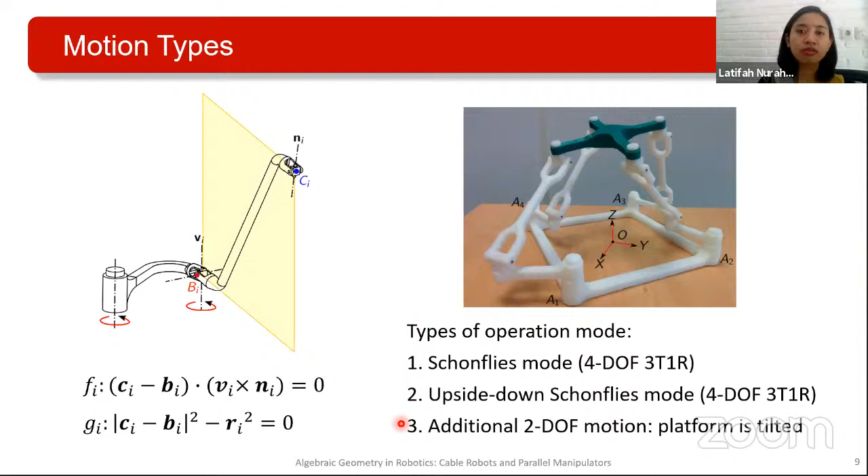Before coming to the drawbacks: because this mechanism has several motion types, this robot is able to change from one motion to another motion. So this is the illustration. We change from mode 1, then we need to pass through what we call a transition. Then it passes through the additional mode, again it goes through the transition, and finally it comes to another motion. We call this reconfiguration, and I'm working a lot on reconfigurable manipulators.

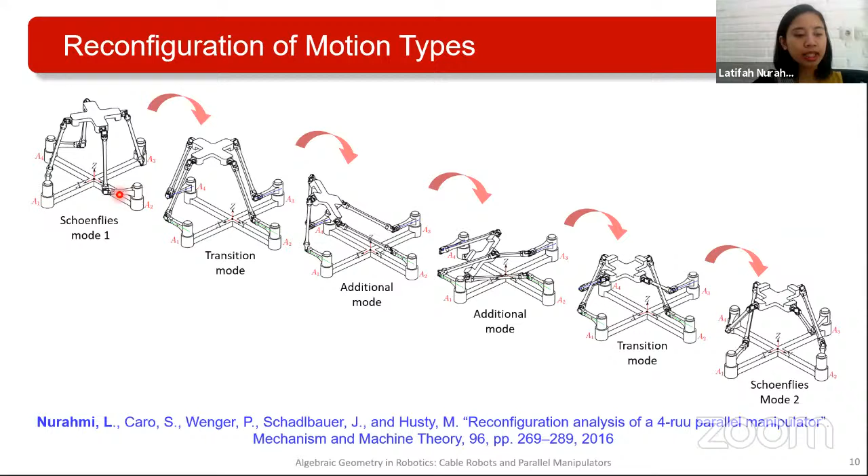But from an application point of view, the drawback of this mechanism is that it has two links. If we see the architecture of this robot, one leg has two links, link 1 and link 2. Why is it a drawback? If we have so many links, from a dynamic point of view we have more inertia to deal with, and from a control point of view we have so many parts to control.

So we changed the architecture, what we call the second generation. Now we replace the first link with the motors. These are fixed motors; all the vertical ones are linear motors. This is also a collaboration with a world-class professor last year, 2019. The derivation of equations is almost the same as before, but the behavior is a bit different and more interesting. We built this prototype. It is still under construction, and we didn't show the whole video because it's still in progress of publication.

And what are the results for the second generation of these mechanisms? Again, it has two types of 4 DOF, 4 degree of freedom motions. And the most interesting one is the additional 3 degree of freedom mode. How come one robot can have 4 degrees of freedom and at the same time another number of degrees of freedom? This is an interesting challenge for us roboticians. We need to answer this.

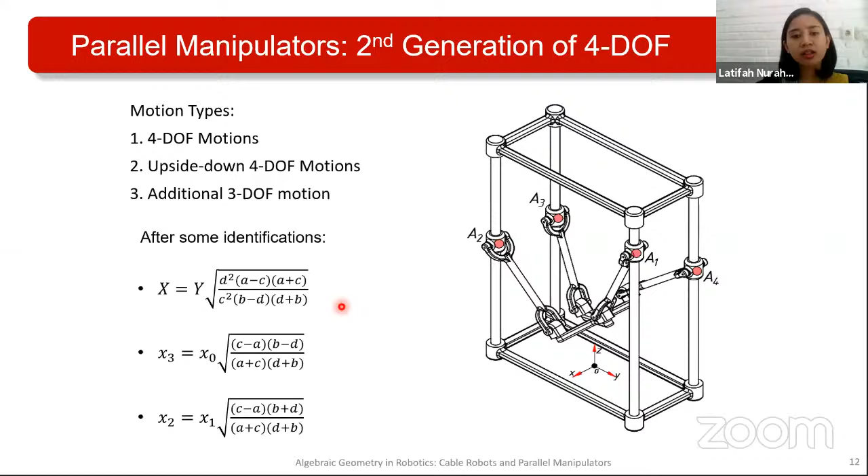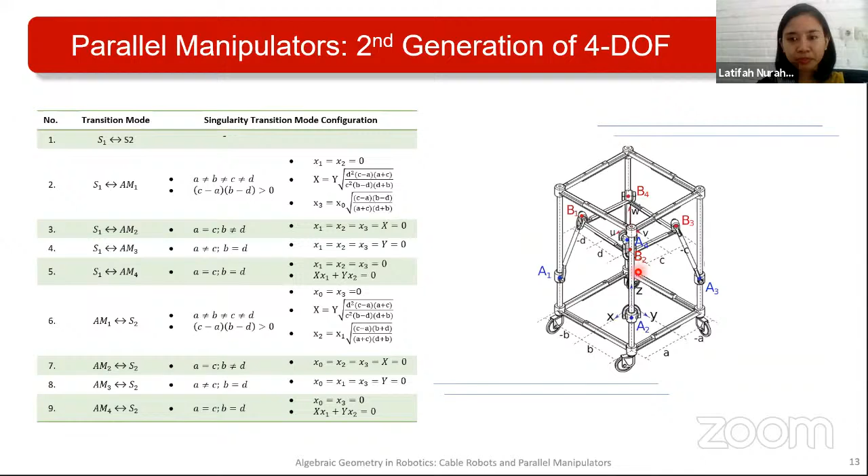After some identification, we came up with these mathematical formulations. From them, we can classify several dimensions, several shapes of the platform. So if we change the shape of the platform, the motion will change also. Here is a simple video illustration. If we change the shape of the platform and the base, we have 4 classifications of the robot, and this is how we change it and how it looks.

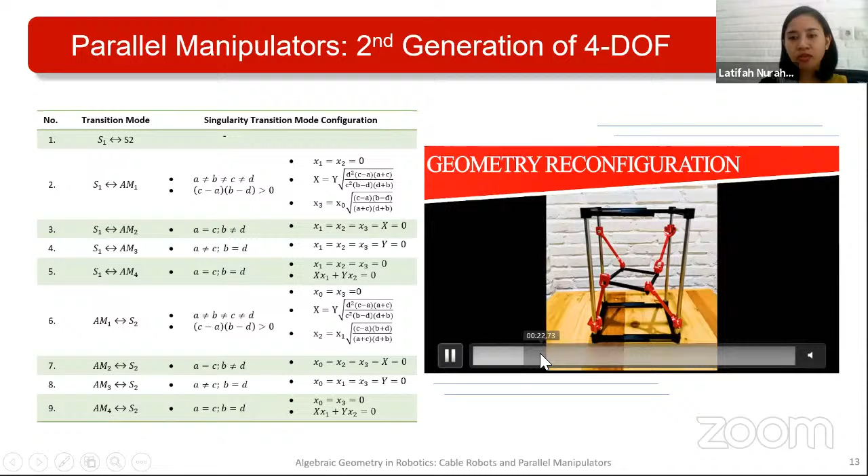We have several steps in executing the task. We usually draw it in CAD software first. After that, before building the prototype, we print it. We want to make sure that this robot is really able to perform our theoretical results. By 3D printed parts, we can show that the platform and the base change. And we show it again in CAD software, it has this motion. I will speed it up.

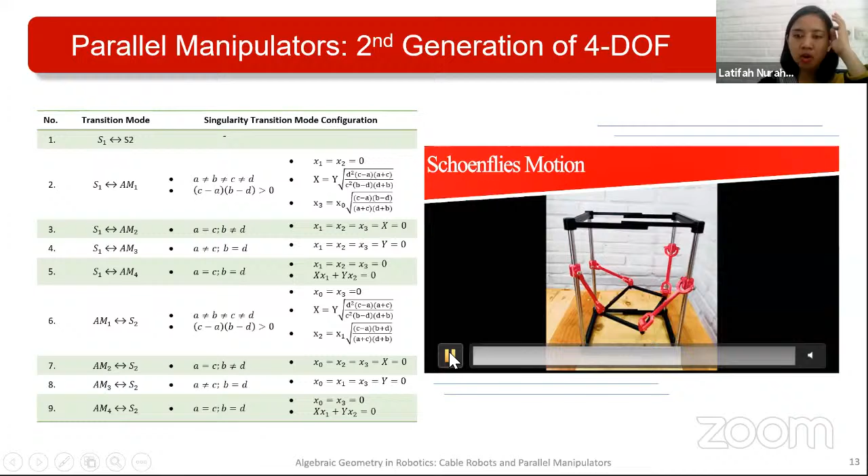And then we showed it in our mockup, the 3D printed part. The prototype I have shown you is actually the last step for building the robot. This is still the second step because the prototype is not done yet. So what I'm showing you here is the 3D printed mockup. This is what we call in robotics changing into another motion.

This is a big challenge for us roboticians, because to change from one motion to another, we need to face singularity. In the beginning, I showed you what singularity is. For a black hole, singularity means the laws of physics don't apply. The same here: in singularity, we need to find what kind of law applies for tackling this singularity.

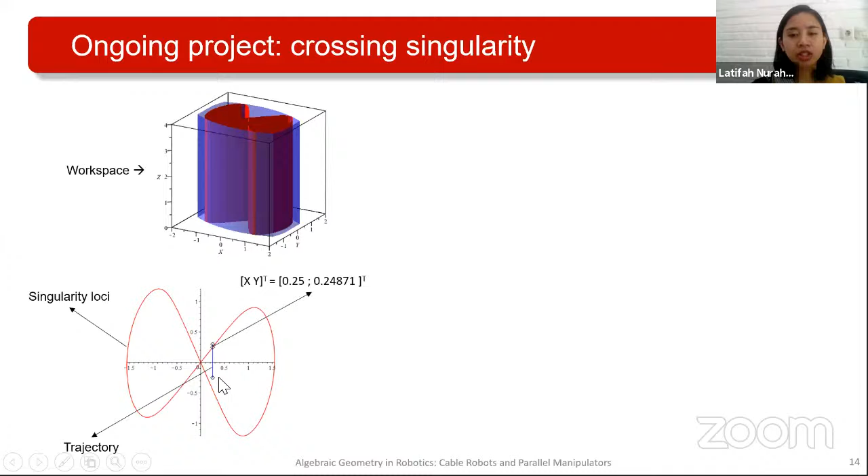So whenever the robot crosses the singularity, the behavior of the robot is uncontrollable. Any kind of law you want to apply, control, dynamics, kinematics, it does not apply. So this is very annoying. So we want to cross this singularity, but from a dynamic point of view. So we generate a trajectory. We built two types of trajectory.

The first trajectory, you can see these equations. The first trajectory is a 5th degree polynomial, the usual one that you can find in many journals and papers. And the second is 8th degree. And what happened in the force distributions of those two trajectories? So in the left picture, this is the force distribution. Here is what I'm going to interpret.

What does this mean? So in the left picture, it shows that when the robot moves, it moves with a very normal behavior. And when it reaches the singularity, it needs infinite values of force. Millions of newtons from your motors, which makes it impossible to cross the singularity.

So we manipulate from a dynamic point of view. We derived an algorithm from a dynamic point of view. So at 0.8 seconds, plus minus, we can cross the singularity from a dynamic point of view. There are many aspects that we have to consider, but I'm not going to present all of them here.

So this is the ongoing project where we want to apply this algorithm to the prototype. The mock-up is to show the kinematics, and in the prototype we want to show this dynamic algorithm. Okay.

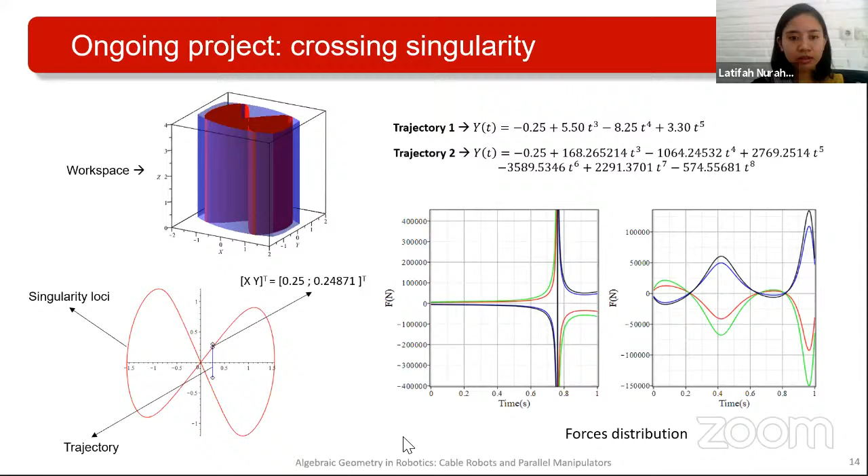So by computing these equations and formulating the Jacobian matrices, we can find the workspace, because of course, when we build manipulators, we need to know whether the robot can perform this kind of motion, how big, and if we put it on our leg, can the robot follow our motion and at which position? So we need to answer all of that by finding the workspace. So we can find the workspace.

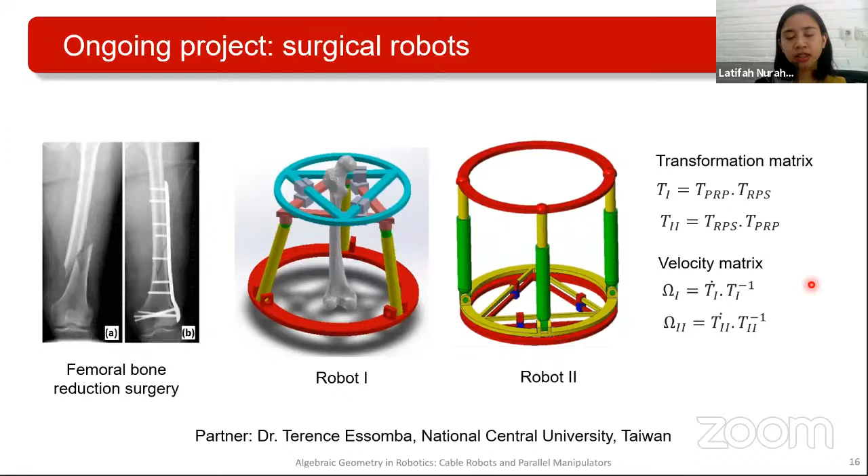Now, the way we formulated the velocity is a bit different from the way we used to do it. The way we did it now, we have to formulate the matrix. Why? Because this is a new type of robot. This is a hybrid robot because we combine two parallel robots together. So we need a new way to formulate the velocity properties to find the velocity of the robot. So this is an ongoing project. New results are coming up.

Then the next one, at the end of my talk, is about cable-driven parallel robots. From the name cable-driven, this is different than the parallel robots, but actually they are brothers and sisters. The difference is we replaced the rigid link. As we saw before, the robot uses many rigid links, and from a dynamic point of view we have to deal with the mass, the center of gravity, and so on.

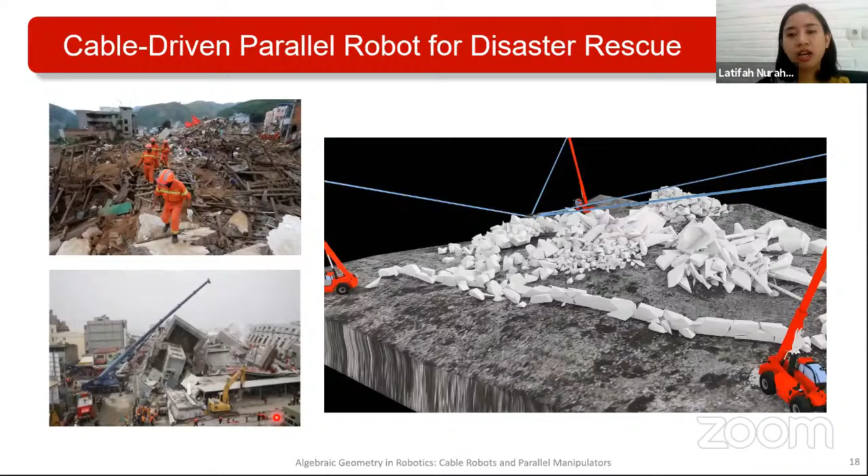Usually we use cranes, but they work independently. So what if we make those cranes collaborate and work together to lift up the debris, to lift up the victims, and for the recovery process? This is an ongoing project. We faced problems when developing this robot, what we call tipping and rolling. We see here in the right animation.

For example, we set the payload to 1500 kg and the robot is executing the task. At some point, one of the cranes will collapse, whether from the tension, the pose, etc. There are many mechanical aspects we have to take into account. And we introduced the concept of reconfigurability. So what is the concept of reconfigurability?

While the hook, the main point, is executing a task, for example lifting the debris, the arms of the cranes can be extended or shortened, and the angle can also be changed. So we can see here with the same payload, 1500 kg, the robot now doesn't collapse, doesn't tip, and doesn't roll.

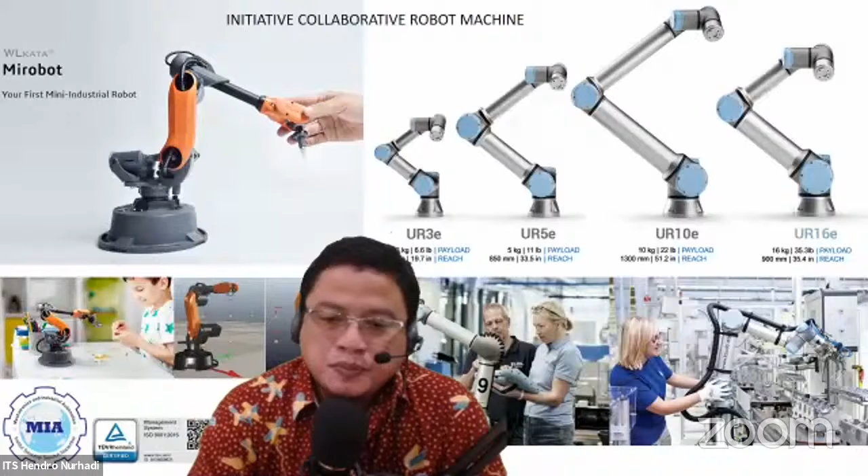Thank you for your curiosity and also interesting feedback for the cobots. It just arrived yesterday actually, and since yesterday we also do some exercise with the robots, especially on how to define how to move the robots by defining the pathways, the waypoints, and also we hold the end effector of the serial manipulator and guide the robot how to move.

So this kind of approach we are trying now, and our first step in observing the performance of the robots is how accurate the position that might be achieved is, and also how stable, and how to identify the acceleration and deceleration performance.

So this is actually an already commercialized and established product developed by the industry. We would like to reverse engineer these robots to define our own next design criteria for our cobots by our design. So you might also supply the information of your current research from Taiwan. I think it's a good way to synergize or collaborate these two different approaches for collaborative robots.